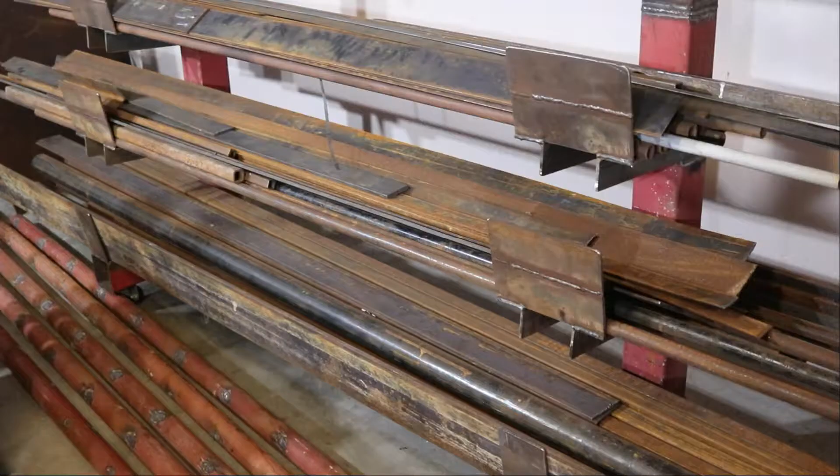So here I'm in the garage, and I'm trying to clean up and make some more space available. So I have my rack here. That's my steel rack, and I made this, I don't know, a year and a half, 2 years ago, whatever. And it doesn't take up too much space, but I'm still trying to maximize my floor space. So I'm thinking of going with a skinnier rack and going vertical.

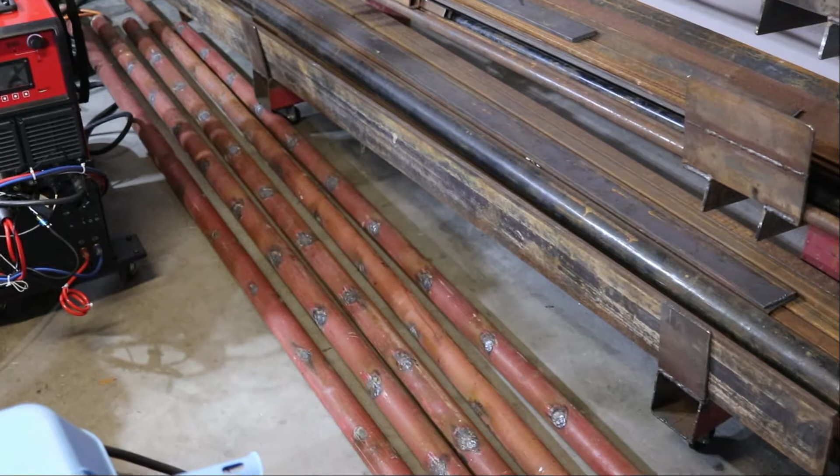So I have some scrap tubing. I literally got this for free. This is a 2.5 inch schedule 10 pipe. Like I said, got it for free. It's just sitting on the rack anyways. So it's about 2 feet wide, give or take. So it's taking up 2 feet from the wall.

So I was thinking, you know what, maybe I can just go vertical and go pretty much the width from the edge of the garage door to the walls, which is about 12-13 inches or so. And that way I can keep a small footprint and just go vertical. So let me see what I can come up with this scrap, and let's see what I can do to save some space.

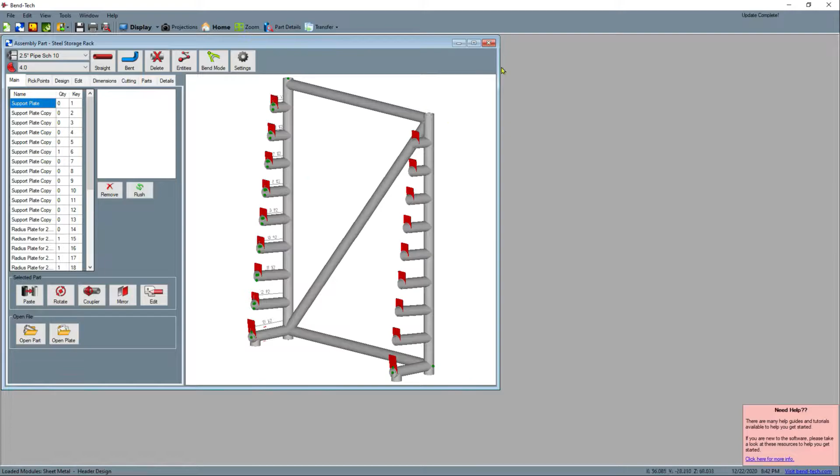All right, guys. So here's what I ended up doing. I ended up updating my Bend-Tech software. I had a Bend-Tech 6X Pro. I updated to 7X, and I came up with this design for the steel rack. It's a pretty nifty tube bending software. Even though I'm not actually bending any tubes, you can work with the designs even if you're not doing any bends.

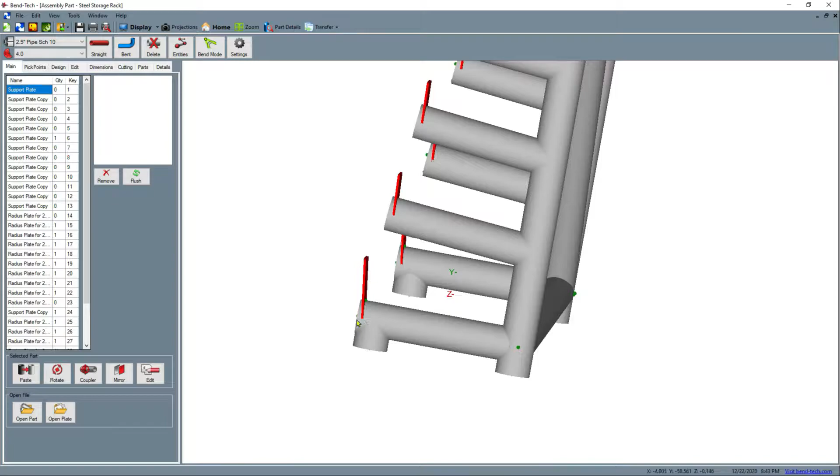So here's the design I came up with. It's about 5 feet wide, about 6 feet tall, and I have a bunch of smaller racks so I can save on floor space. It's only just shy of 15 inches from the back all the way to the front. So it's gonna save me some space there. And those little red tabs are just a plate to hold everything in place.

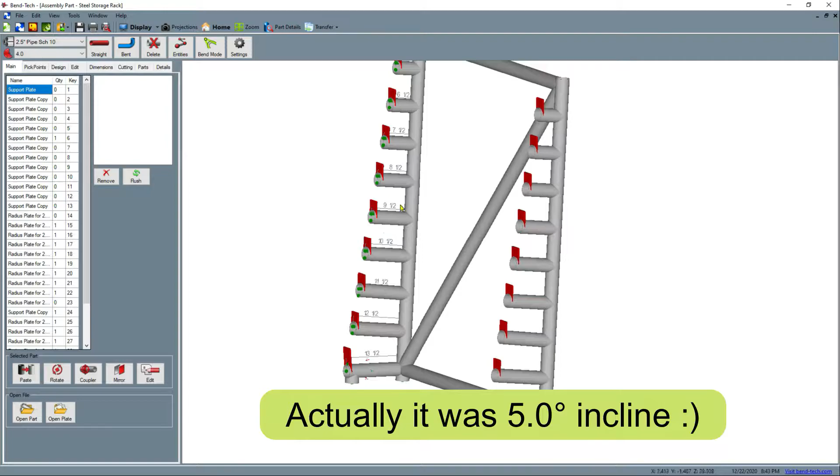The bottom leg is flat, and the rest are angled upwards about 5 degrees. And each one keeps getting progressively shorter as they get higher along the vertical tube, to keep the center of mass a little more towards the back side. It's going to be secured to the concrete floor anyways, but still, that way I can save space and hopefully keep everything more organized.

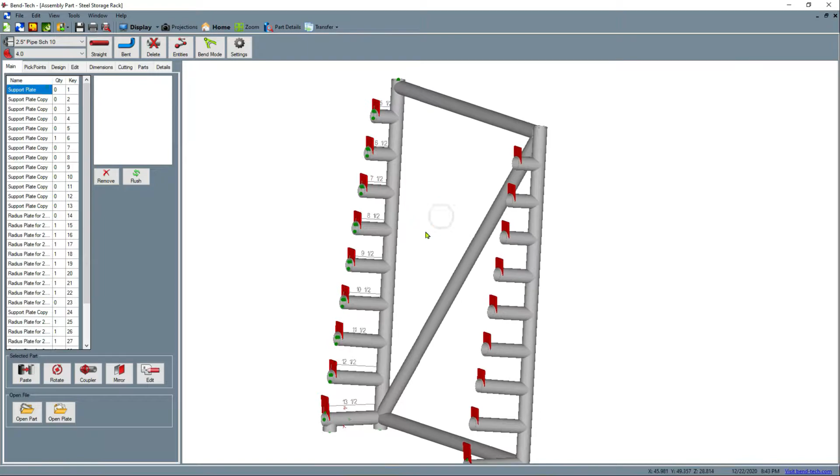So I already did this design, as you can see. The nifty thing is that you can use pretty much whatever material you want. You can specify your own material, your diameters, your wall thicknesses. You can work with regular round tubing, square tubing, rectangular with unequal dimensions, I think. That may be an option, I don't remember, I would have to check. But yeah, it works pretty good. It keeps track of all the parts that you're using. You name them, and you can see individual parts there.

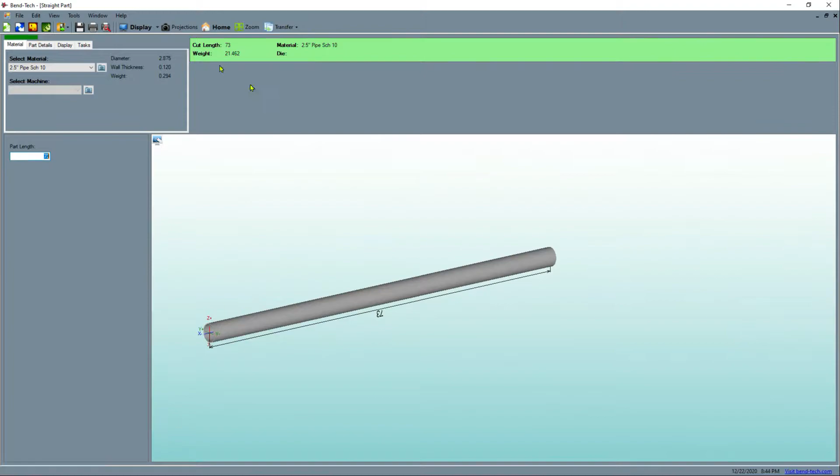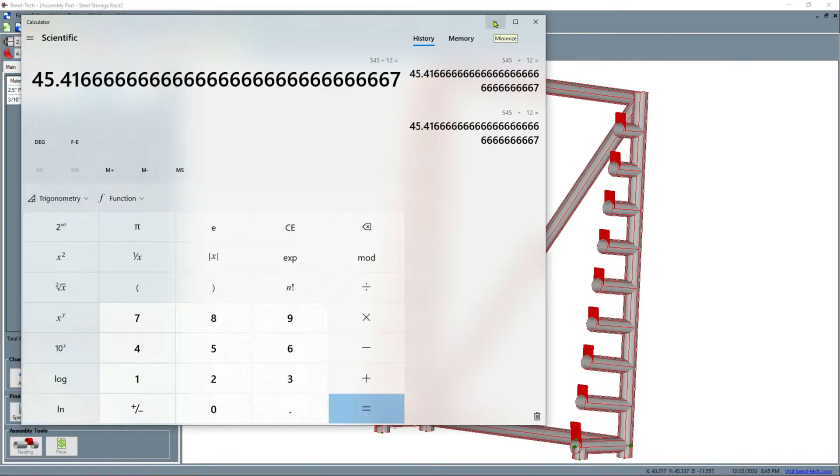And no, it's already there. So let's see, details. It keeps track of how much material you need. 545 inches is what I would need for the pipe. So that ends up being about 46 feet. So I think it's doable with that scrap pipe that I have left over. Again, it's just sitting there.

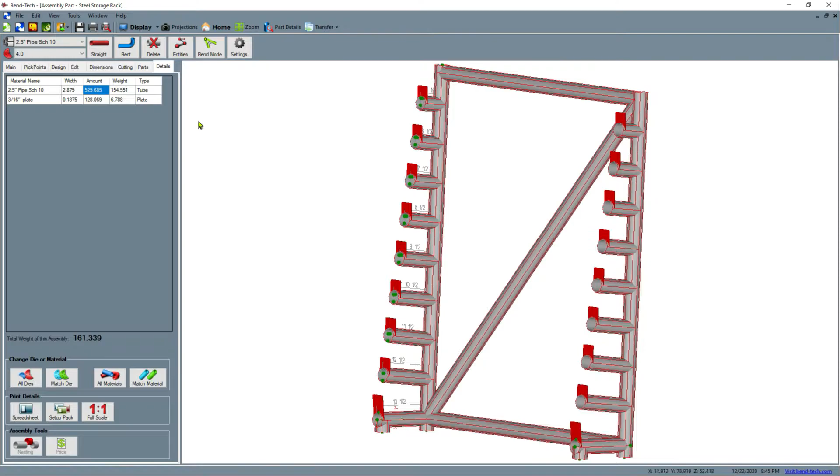So that's about 155 pounds plus another 7 pounds or so for the 3/16 plate, for those little supports to keep everything in place. So overall, it's going to be about 161 pounds. That's based on the information that I input. For the tubes, you tell it how much each linear inch weighs, and for the steel plate, you input how much each unit weighs, and it calculates everything for you based on either the volume or the area and the thickness.

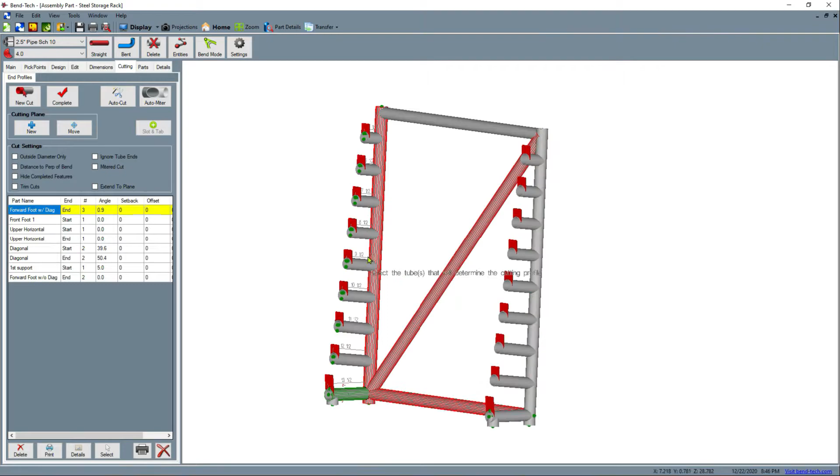Okay, so let's look at the cutting. Here I have already generated the cut wrappers for the fish mouth copes. The first one is this little forward foot, this green one. This is the one that's going to be cut to these red tubes over here. So my plan is to first create this rectangular frame with the diagonal. So it's already gonna be pre-existing. That's why this one is gonna match up to that triple joint right there.

We change the projection, or the display I should say. So there you can see it generates the proper fish mouth cope to mate up to all of those tubes right there. So that's only one end, so that's only one cut wrapper.

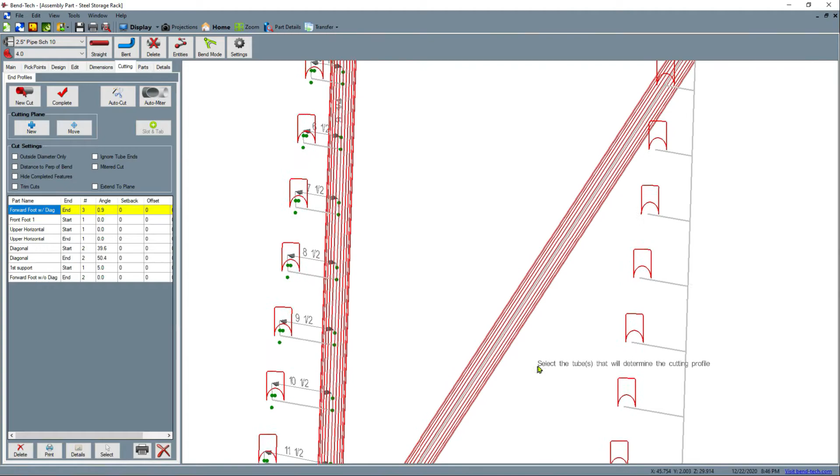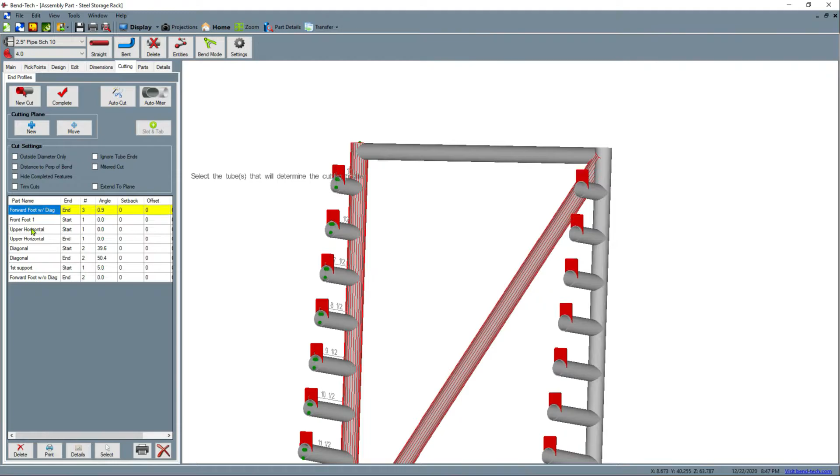But depending on the part, for example, this top horizontal tube, it's gonna have two identical copes, one on each side. So it's gonna go on there before the diagonal goes on there. So they'll be identical, but instead of using only one cut wrapper, I generated two for the upper horizontal. So I generated this one here, as you can see, standard fish mouth cope, and the one on the other side as well, same thing.

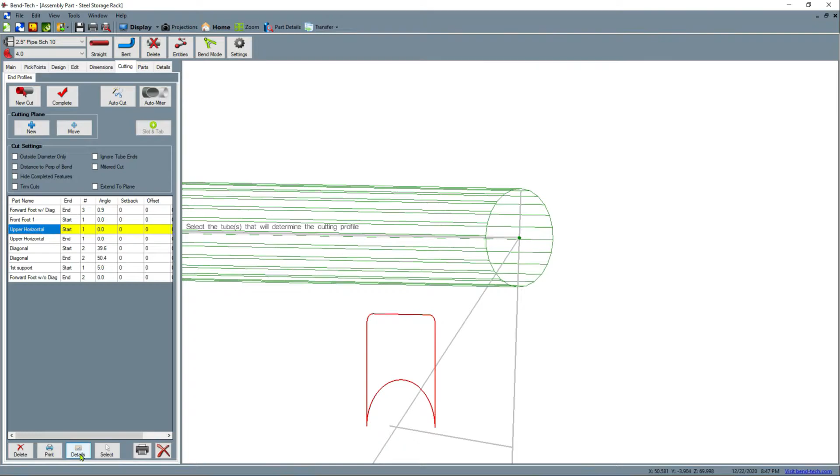So the reason I generated two is because here you can designate the start and the end. So when you look at one, it has some guides, see, lined up with the second cut mark. This is the first wrapper. You wrap it on one end, and then this blue line, you line it up all the way on the other side. In other words, to maintain the proper orientation of the cuts.

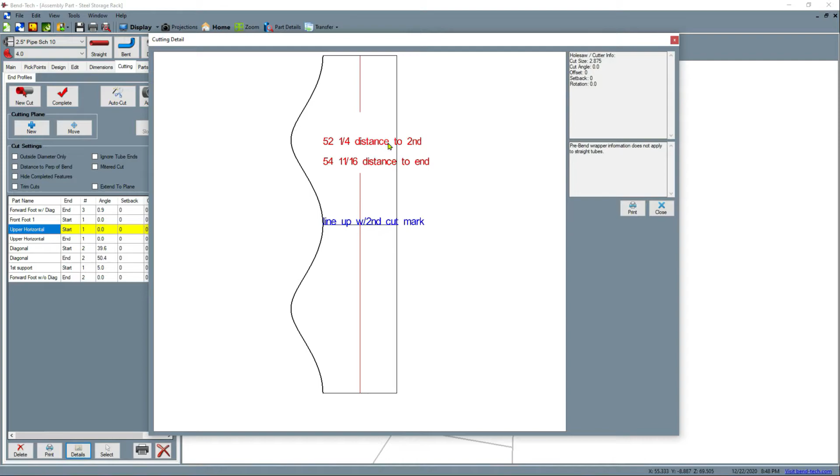Then it has these red lines to help guide on the distances. So you can use the red line to match up to either the end of the tube, if there is not going to be any other cope on the other side, or you can match up this line 52¼ inches to the second cut wrapper. It's going to be on the other side of the tube. It'll have its own red line.

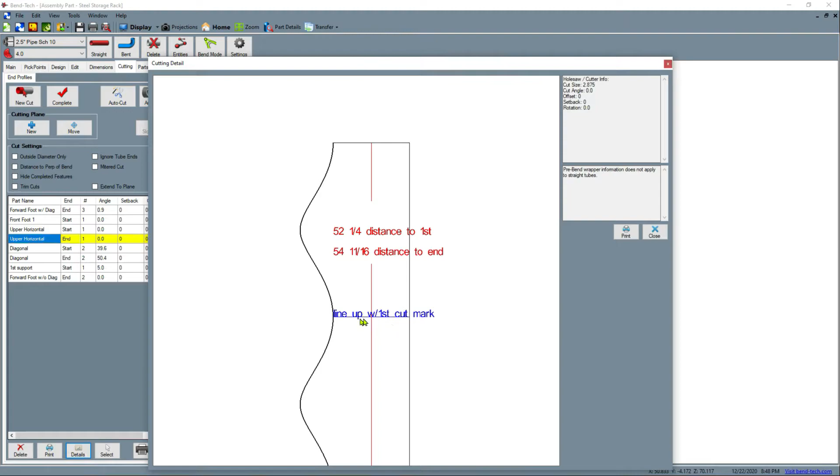Close this, so the end part, details, here we go. See that? 52¼ to the first cut wrapper on the other side. And then you line up the blue mark with the blue mark, and that way it maintains the proper orientation of the copes, because you don't want it to twist, then it's not going to match up on one side. So pretty cool. The diagonal, same thing, similar thing.

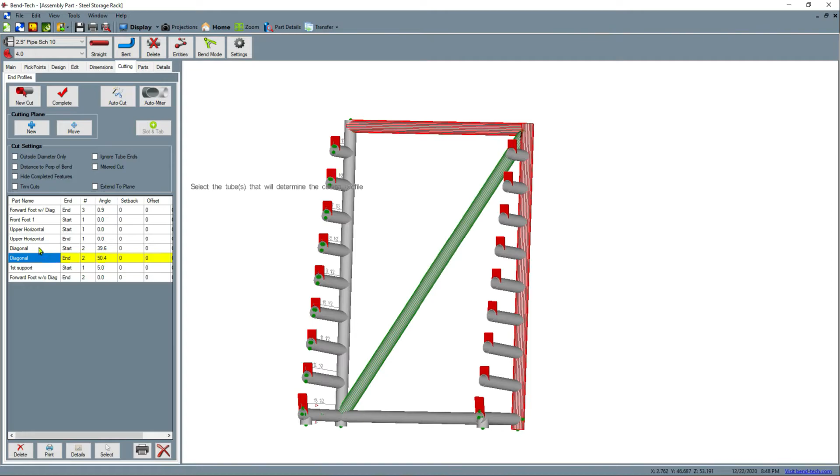Zoom out. The diagonal will have, again, two cut wrappers, same cuts, but you have the two wrappers in order to generate the cut marks that are going to be lined up. So again, it helps you maintain the proper orientation. You just have to have a line going down the tube all the way down without having it twist or turn. It's got to go straight down on one side.

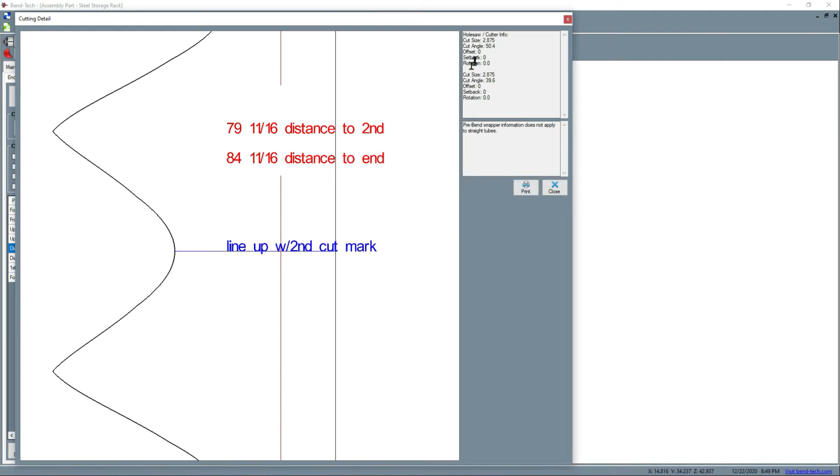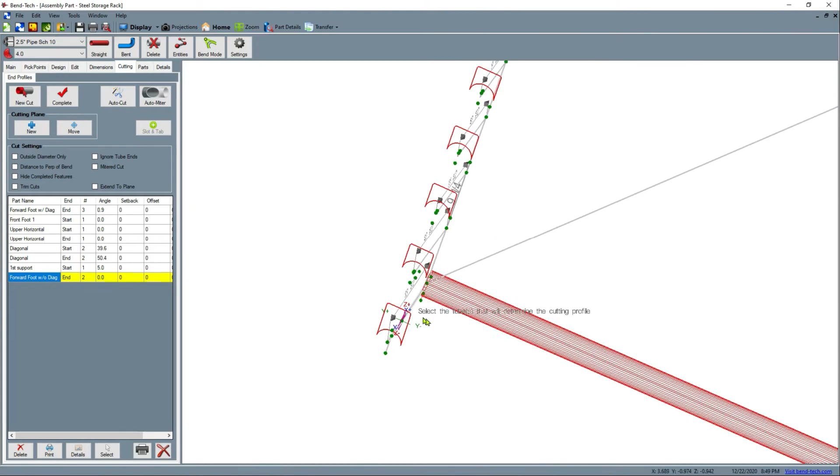So you could use, if you have a piece of angle iron that's long enough, you can use that to make this line, or you can come up with some other way with like some stringers or whatnot. So yeah, these cutting profiles that are generated are pretty cool, and as you can see, it takes into account the wall thickness. There we go. So pretty cool. Takes everything into account.

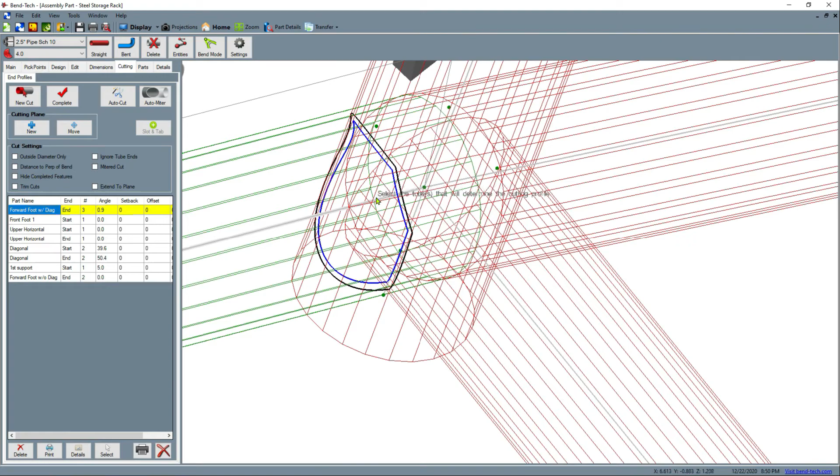And of course, gonna use the plasma cutter for this. Not gonna try and find or make a hole saw for this size pipe. So I'm just gonna use the plasma cutter, and then just trim it down with a grinder if need be to smooth it out. So yeah, there you have it. This is what I plan to make, and of course you can print everything out.

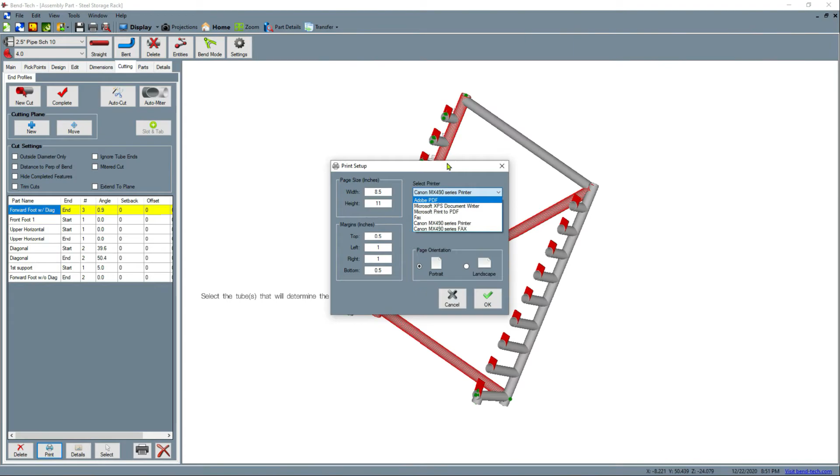In this case, I had to change the margins on the 8.5 by 11 sheet of paper, because with this size pipe, the cut wrapper ends up being pretty long, because it's almost 3 inches in diameter. Multiply that by pi, that's, I'm sorry, not over 11 inches, but it's close enough that it hits the margins if you leave them at 1 inch. So I just expanded them a little bit, and then it fits right on the piece of paper. You can either print a PDF to save them and print them later, or you can just print them straight up.

You can print each one individually, or here in the setup pack, you can just print everything: the image, bending instructions. In this case, there's no bends, obviously. The tube lengths, which is important, and then the cut wrappers as well. So again, you can print the whole thing to PDF. You'll have to rename each one. Every single one of these will be like a separate page or pages. So you would have to just rename it, or you can just print it straight up.

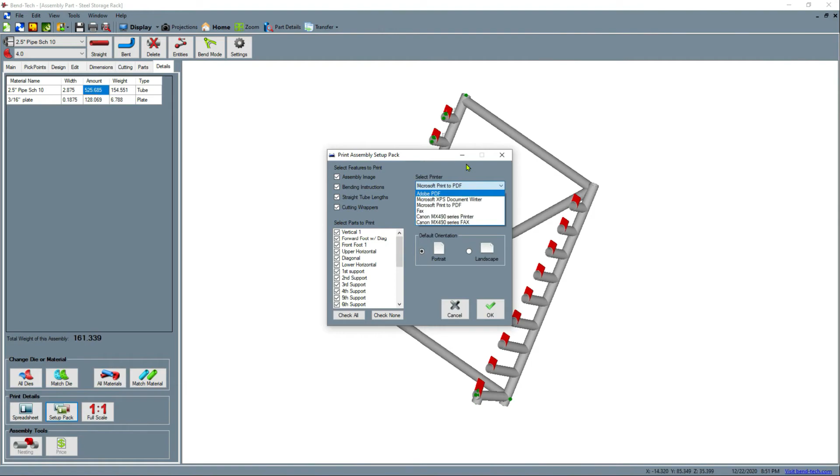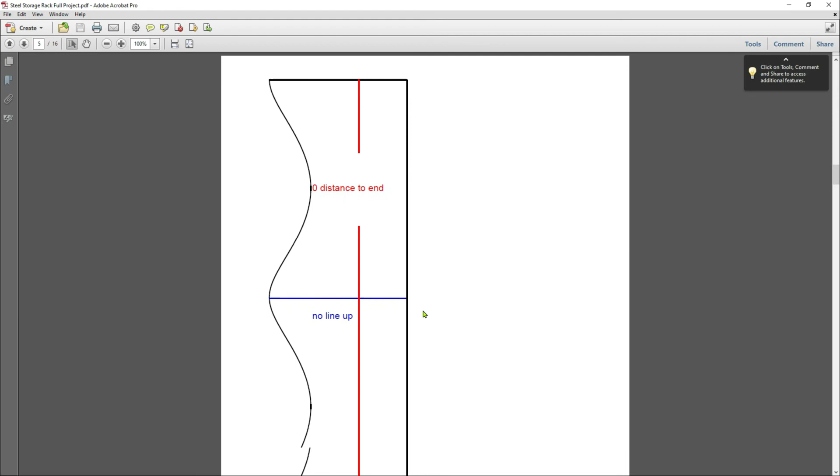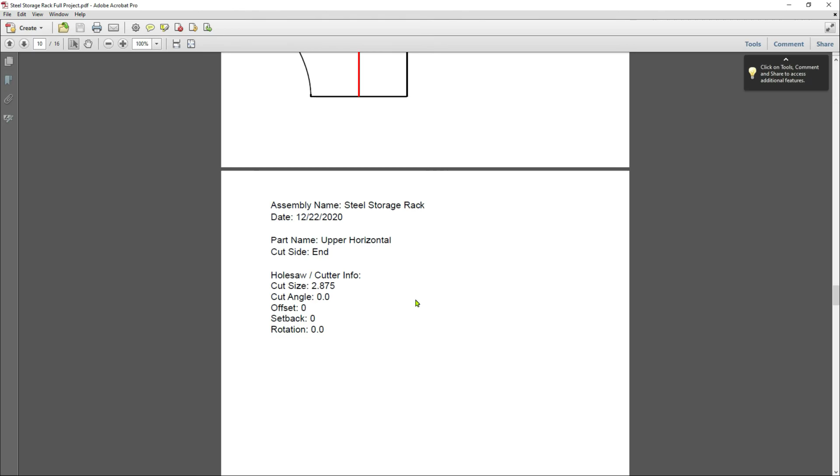Either way, it looks something like this. Here we go. So it gives you the image, however you had it last on the screen. All the lengths, and this is the cut wrapper. The description is underneath the cut wrapper itself. As you can see, they're pretty long in this case because the tube itself is, I guess, pretty large diameter. Usually for motorsports, they're working with smaller diameter tubes.

So pretty cool. So now you just print it out, cut them out, and make your marks, and then just clean up the ends if you cut with a plasma cutter. So yeah, let me work on that. Let's see how this thing turns out.